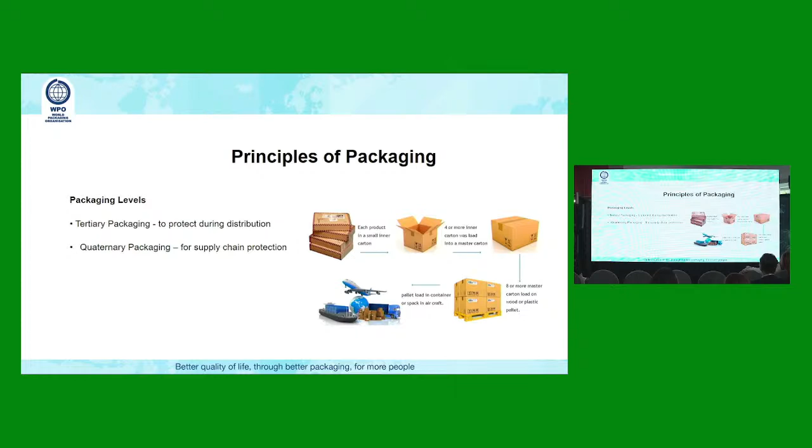All right, now let's have a look at some of the other areas. We looked at containment—what about compatibility? Remember I said that glass is inert. So we could in fact use glass for everything.

But we don't, because of price. Glass is more expensive than plastic. But certainly from a compatibility point of view, it'll be perfect. So now we've got to check whether that product can be used in a particular material.

And when we talk plastics tomorrow, I'll explain to you the various types of plastics, and there's a range of different plastics, and how we make the choice in using the different plastics so that we don't make an error and you're faced with a problem in the market and you have to do a product recall. That is very expensive.

Retention, you can see here in the flowers, for example, that is being supported and is retained and restrained in that carton. For those of you who have ever been involved in flower packaging, it's a very unique sector of packaging that not many people get involved in. Every single day, millions of flowers are moved across the world.

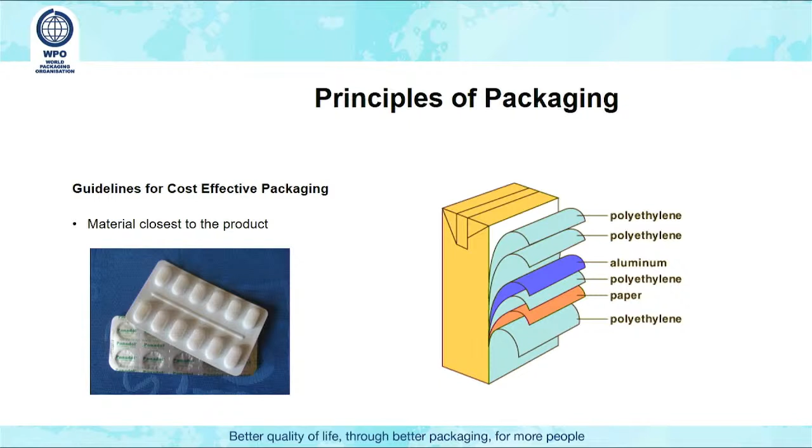That's effective packaging. What about looking at the design of cartons where there's over-engineering? We see this fairly often in corrugated packaging, and I'll emphasize that more tomorrow in relation to designing it suitably for that particular product so you don't overuse the board. Likewise with the image on the right-hand side - if you're using high volumes and that lamination film is maybe 70 to 80 microns, if you went down to 70 microns, you still maintain the shelf life, that's important, but that saving of 10 microns over a few million packs can be of value to your company.

Even with the advent of all these stand-up pouches, you also need to ensure that you are considering the effectiveness of that pack in all manners, not only the material type, but how well it is accepted by the consumer. As I've shown you a few slides ago, how easy is it to open and close and to handle.

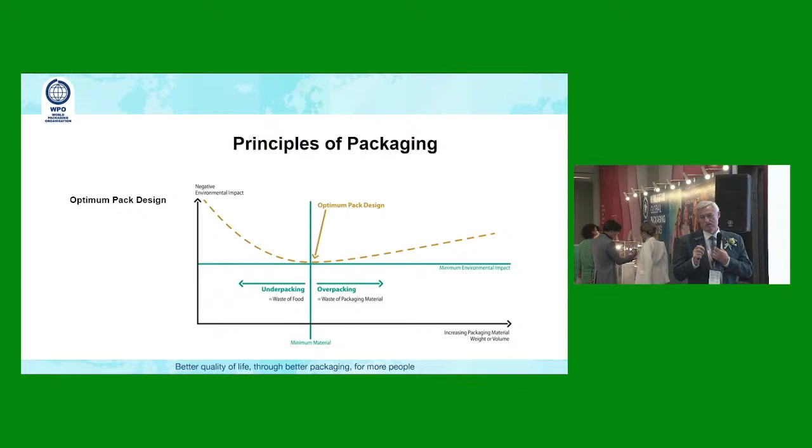All right, for those of you who attended this morning in the conference, we looked at this image because when we design packing, we want to go for the optimum pack design. What do I mean by that? We don't want to overpack and we don't want to underpack, because when we underpack, we could waste food because the packaging is not suitable. If we overpack, we could waste a lot of packaging material.

So we've got to find that spot, the optimum pack design point, so that we don't overpack and we don't underpack, but we maintain the suitable shelf life for that particular product. And that will vary for every product that you're packing. So you can't use one outcome for any other product. You've got to evaluate every single product to ensure that you obtain the optimum pack design.

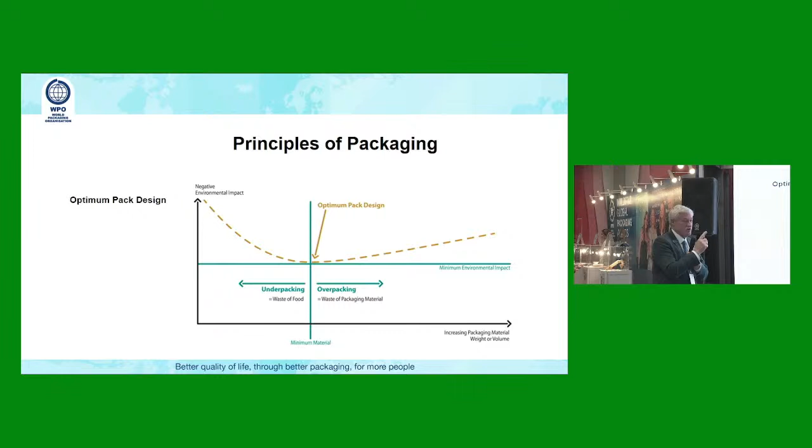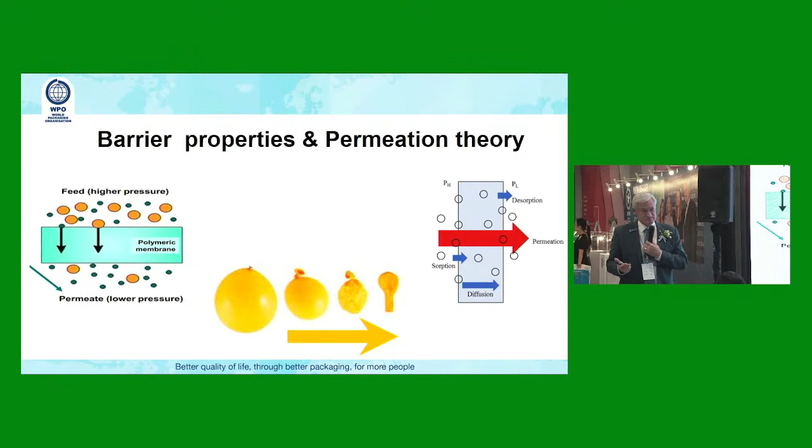Now, some of you might not know the permeation theory or Fick's law, but I use the balloon as an example, because if you blow a balloon up for a party and the next day you come and the balloon's gone flat, it's deflated. Where has the air gone? The air has not gone through the knot that you tied in the balloon. The air has gone through the layer of that material. It's permeated through the wall of the balloon.

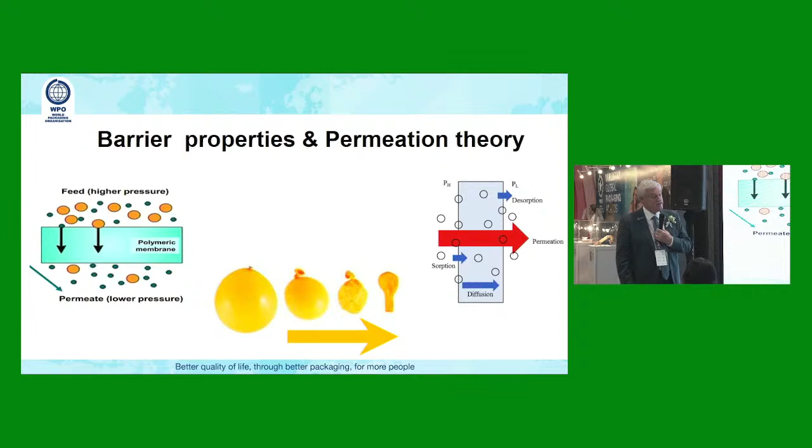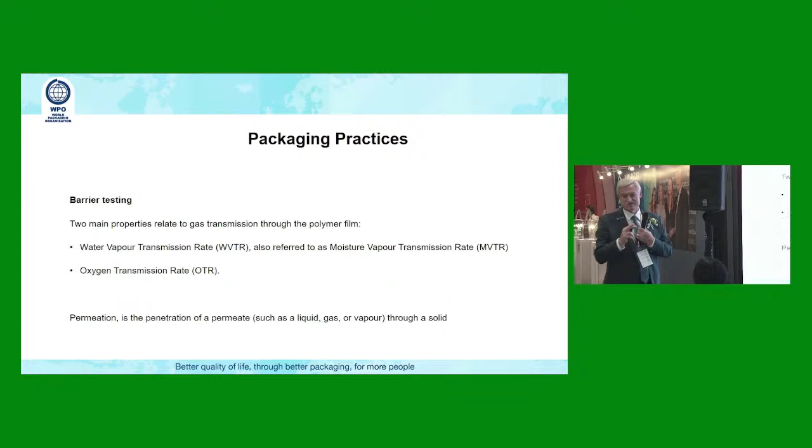So we take the same principle into packaging, same principle. And that's how we determine shelf life. And every one of you that are involved in packaging should, if not must, understand the theory of permeation. Because ultimately we look at the water vapor transmission rate and the oxygen transmission rate. Those are our two pivotal points that we always look at in packaging. We've got to understand water vapor and oxygen to understand the shelf life of a product.

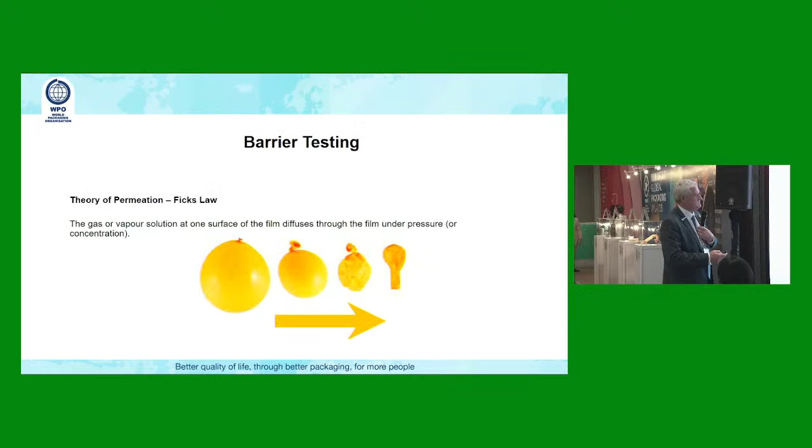So we're going to look at diffusion, Fick's law, this afternoon. So I'm explaining the balloon concept to you, and I'll now take that into a packaging environment. So the horizontal line at the top and the horizontal line at the bottom, I've increased the thickness of the material of the balloon. I've just made it big so you can see what's happening.

The other aspect that we must think about is this RAM, relative atomic mass. Now, don't worry too much about those words if you haven't done organic chemistry and might not understand them. Just look at the principle and try and understand the principle. In relative atomic mass, hydrogen has a relative atomic mass of 1. Carbon, 12, nitrogen, 14, oxygen, 16, and chlorine, 35.

And that relative atomic mass equates to the size of that molecule for that particular element. Okay, for those of you who remember the periodic table at school or at university, that's where those things come from. But for you folk now, all you have to worry about is taking those different elements and equating it to a size, because relative atomic mass shows you the size of the molecule.

And it's those molecules that try and force their way through from a high concentration or a high pressure inside the balloon, the pressure is higher, to a low pressure or a low concentration. That's what those molecules are doing. They're going from a high concentration or pressure to a low. So you can see the top is high pressure, the bottom one's low pressure.

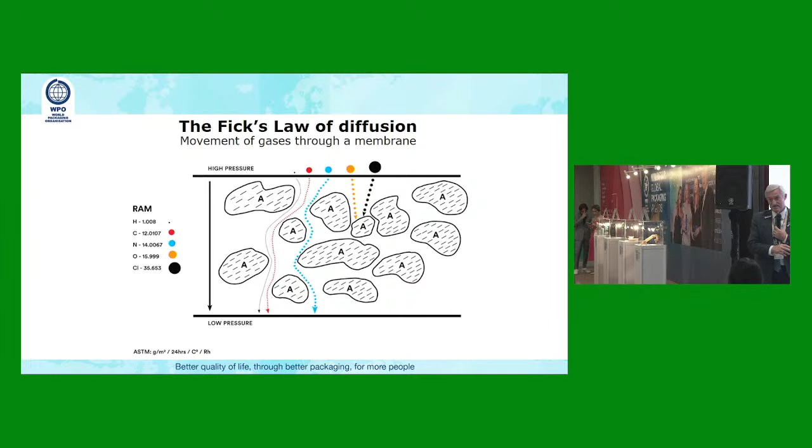So, over a 24-hour period, and you can see down below here, we measured in grams per square meter over 24 hours at a particular temperature and a particular relative humidity, and we have a look at how much of those molecules are coming through in 24 hours. You've got to remember that that image there is in a plain two-dimensional scenario.

You've got to imagine it as three-dimensional, because those A's, which are atoms, are moving all the time. In this chair, in this floor, in the ceiling, in that concrete, they're atoms, they move all the time. Believe me, they're moving. You can't see it, but they are moving all the time. Same as in a material, in the balloon, it's moving.

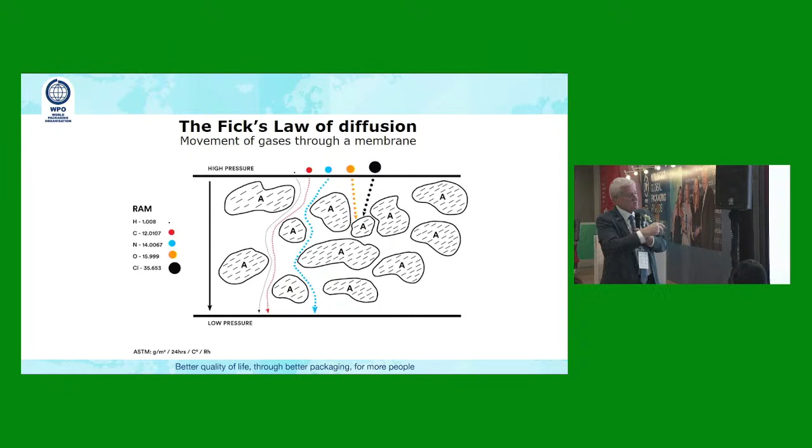So if one looks at the black and the orange, you can see the molecules trying to come through, but it's blocked. At that moment, it's blocked by the atom. The very next moment, 1 second later, there could have been a slight movement and it could slip through. So those molecules are trying to get through, and we measure how many of those come through the wall of the balloon in 24 hours at a particular temperature and a particular humidity.

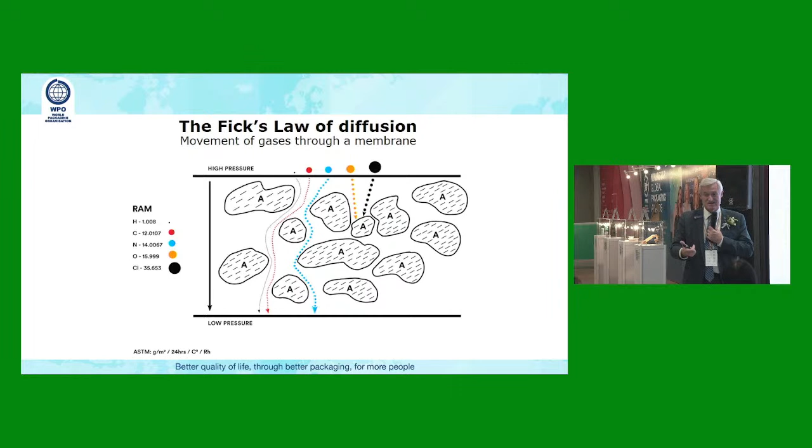And that is how we determine the shelf life. Shelf life is determined by that theory. So you've got to understand the theory to determine shelf life. And you've got to understand the theory to determine which material is the best material for your product at the cheapest price. Don't forget, you've got to remember the cheapest price, always. Okay, and that's just showing you how we apply it.

Right, now that we've looked at the basics, and I'm hoping that all of you understand them. Any questions before we go into glass? Any questions from the two ladies in the front that you'd like to ask? Is Ms. Atala listening? Any questions from you? Not. Right. Any questions from anyone else?

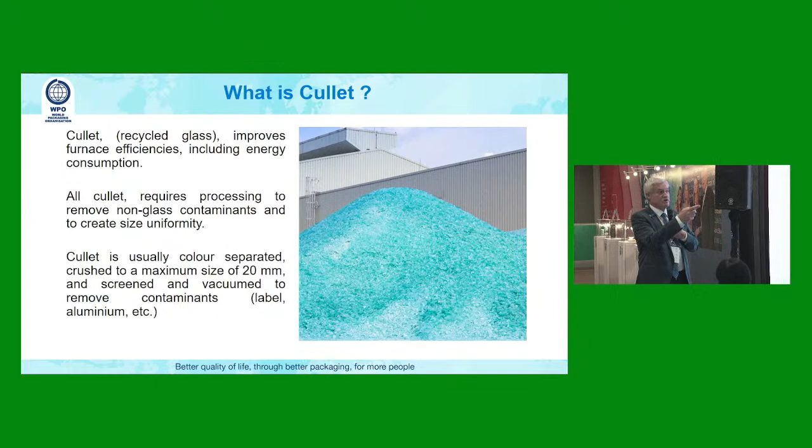You think I'm not going to ask you any more questions, that's why you're leaving. Is that right, Mr. Atta?

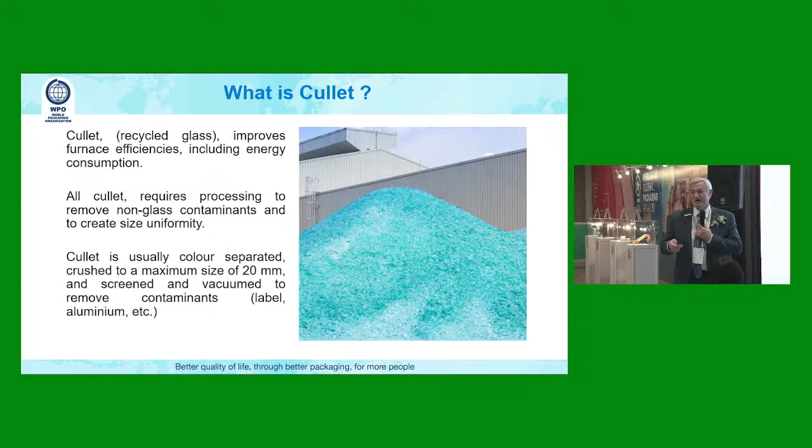We have type 3, type 2, and type 1. Type 1 is the most expensive. We use that in pharmaceutical. It's got borosilicate glass, and we only use it where we really have to. And then the cheapest one is type 3 glass, and as you can see, that's general glassware.

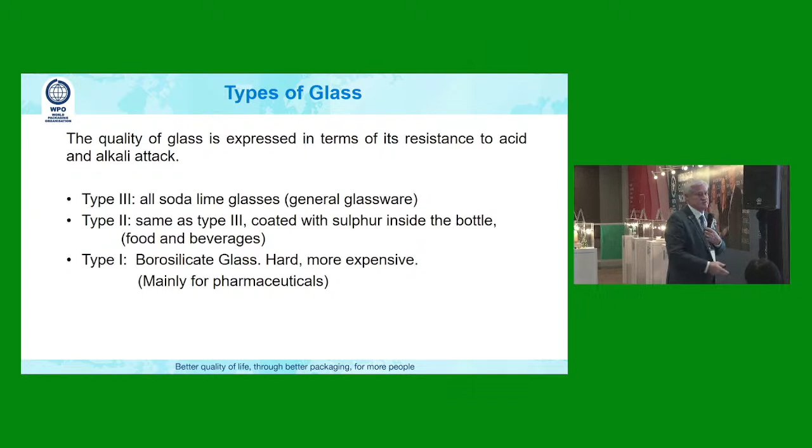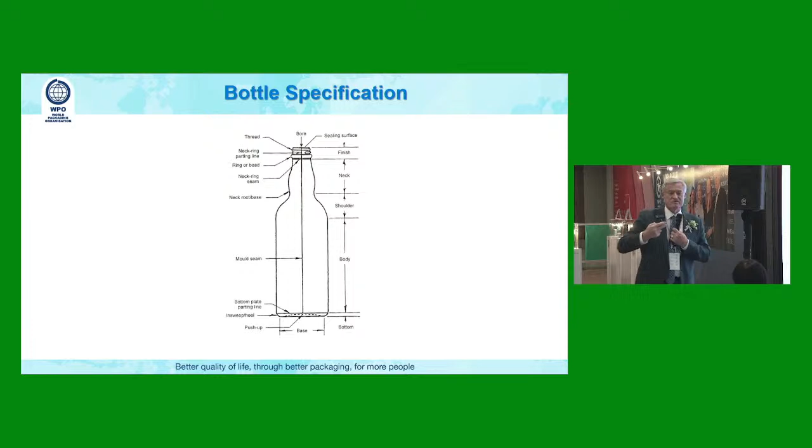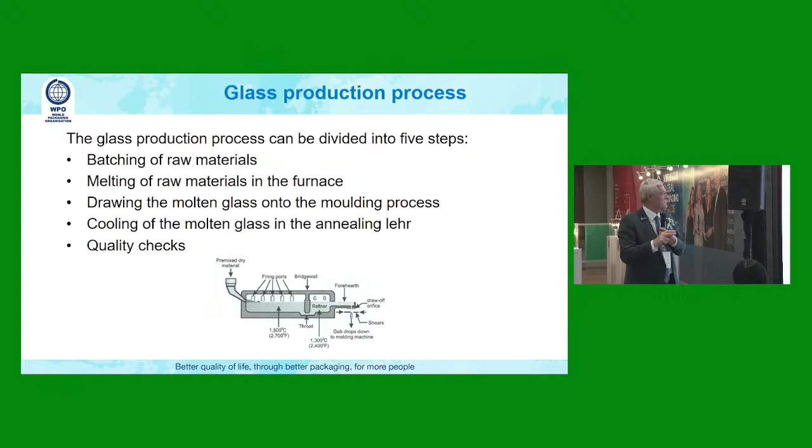And if we don't understand where we require the flow to be suitable and use the right name when corresponding with the supplier, then you won't get the message across in what you're trying to achieve for your particular pack. Okay. So those are the 5 steps that we look at very briefly. We've got the raw material, we put it in the furnace, we melt it, we then put it through the molding process, anneal, and then we quality check it.

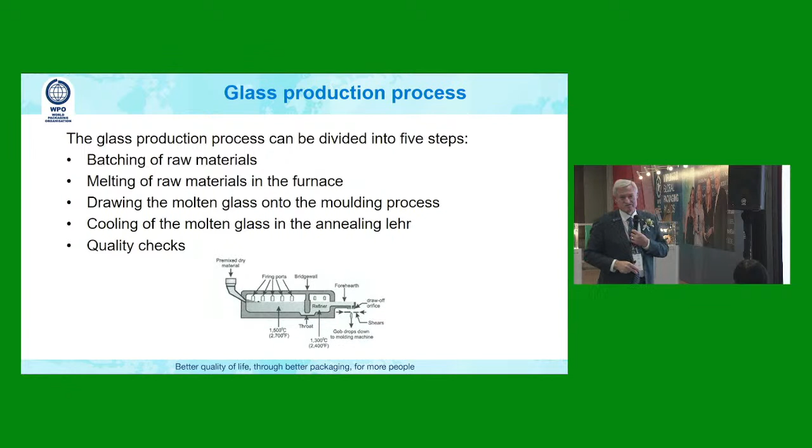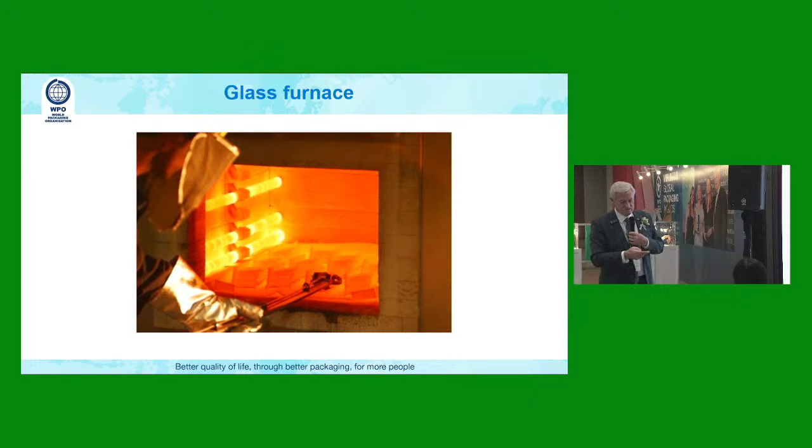Let's go through those more definitively. That's the furnace. And we heard a moment ago, 1400 degrees is not unusual for the melting of glass. So it's really, really hot. This photograph, for example, this is a guy here, you can imagine how hot that must be to work so close to that furnace. This gives a nice image of what we're trying to do in the glass. You can see all the components being added into the furnace. You can see the furnace there.

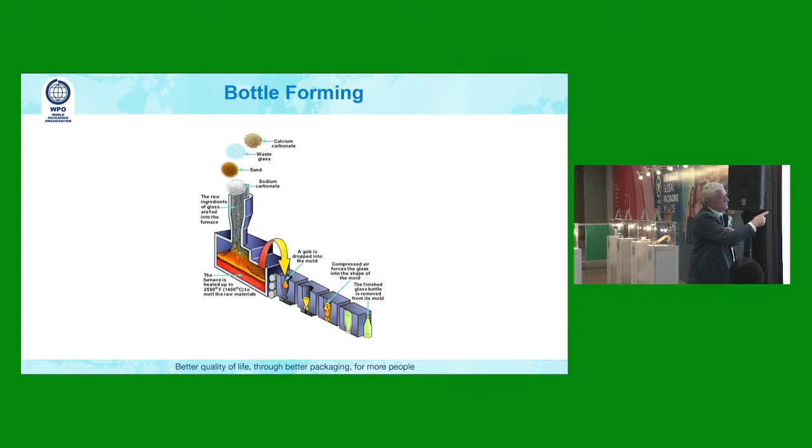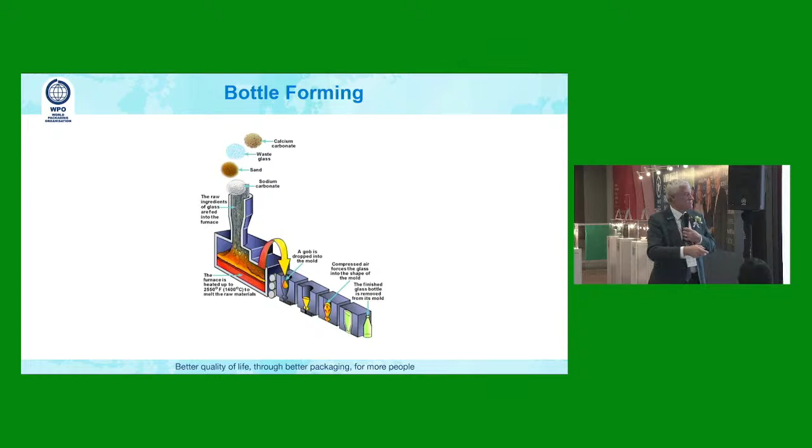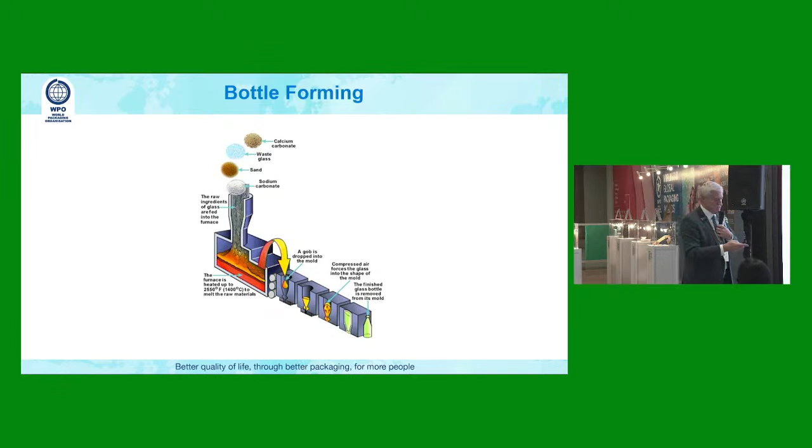That's then transferred into your mold. Now remember this image for those of you who are coming back tomorrow for plastics, because what we do in plastics is very different from what we do in glass. Glass is very aggressive. We need thick molding apparatus. These parts over here are ceramic based, very different to what we'll see tomorrow in plastics. But they're still molds, all right? So bear that in mind tomorrow. That's when the bottle is just coming out of the molding process. So that temperature there, you can imagine, is extremely hot. You cannot get close to that.

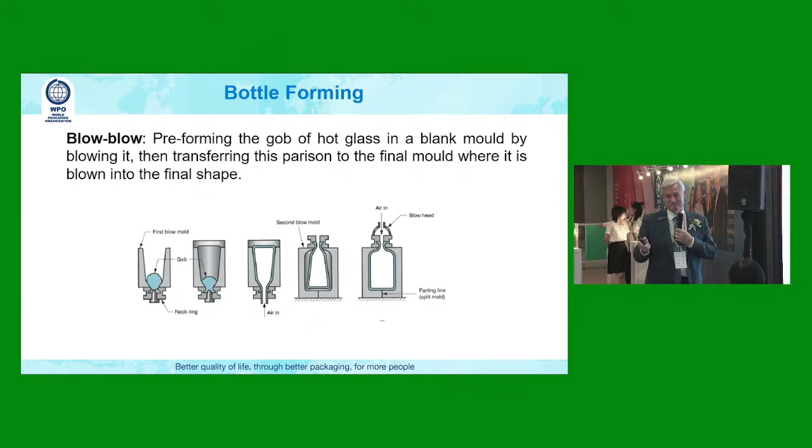Even with protective garments on, it's a challenge to remain there for an entire shift, and so they change the shifts quite regularly for people working close to the furnace. What I always say to people is, if you like your holidays, don't work for a glass manufacturing company, because glass never stops. If the glass solidifies in the pipes, you can imagine you've got a problem. So glass never stops production.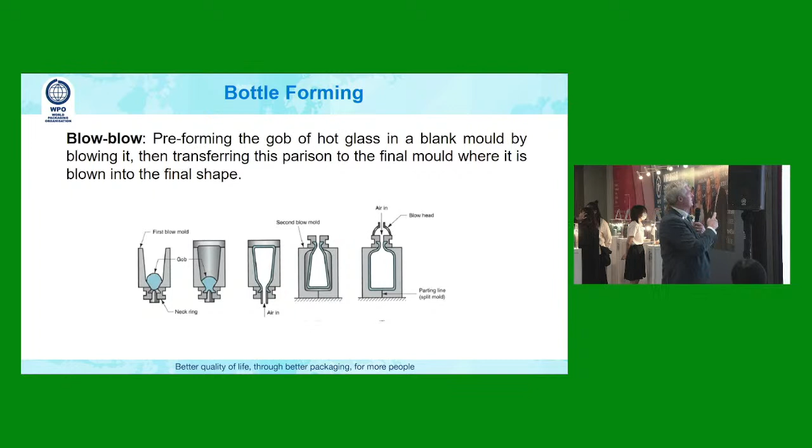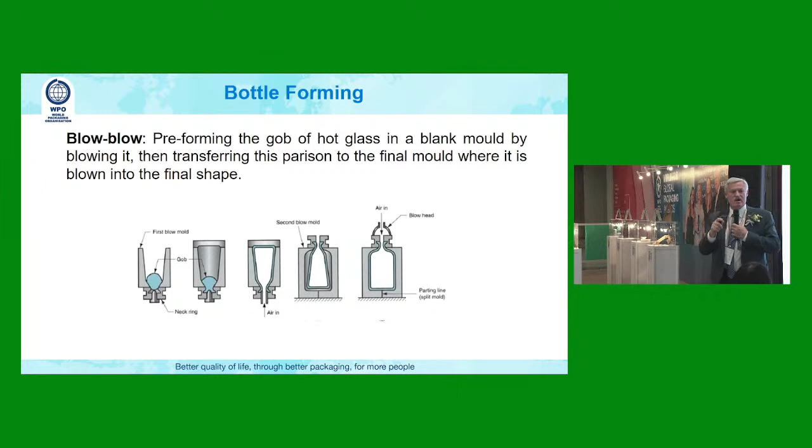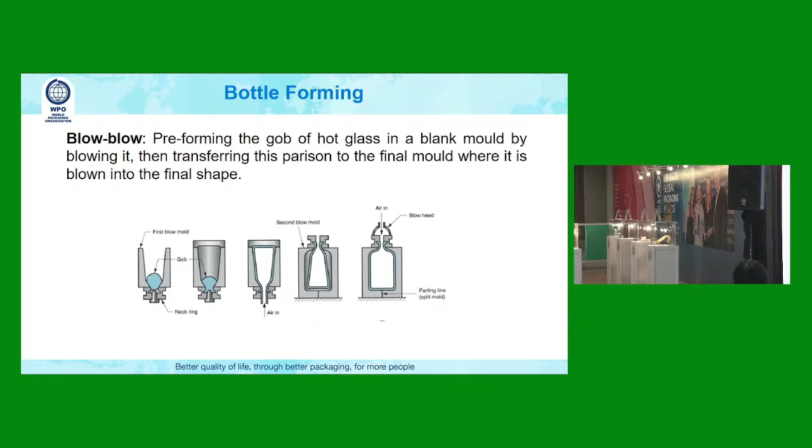We've got three different ways that we mold glass. The first one is blow-blow. What we're doing is the gob comes into the mold, the mold closes, and we force air into it in the first phase, then blow in the second phase. You can see it folds it up. We call it blow-blow. We only blow when the orifice of the bottle is smaller than the diameter of the bottle.

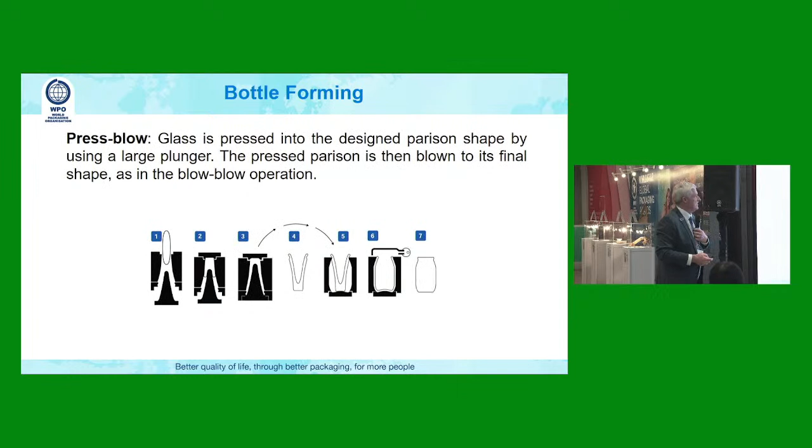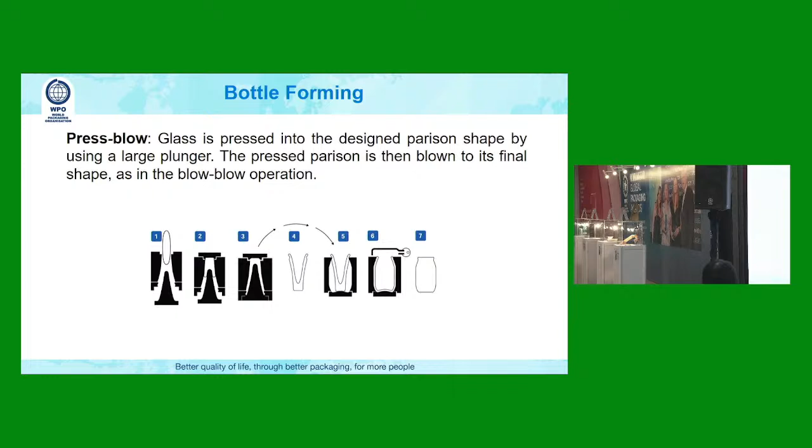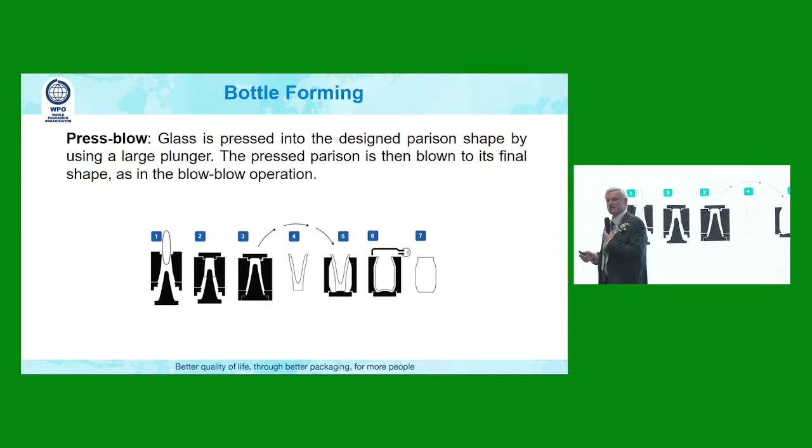Next is press blow. We press the mold first with the gob of glass. The mold closes, a male die comes in and makes that shape for the first phase - that's the press part. Then we transfer it, close the mold, and blow it up into the jar. Again, we have to blow because that size is smaller than the diameter of the bottle or jar. So that's press blow. The last one is press, which is just that first phase only, like a glass for drinking water. So those are the three different ways we manufacture glass.

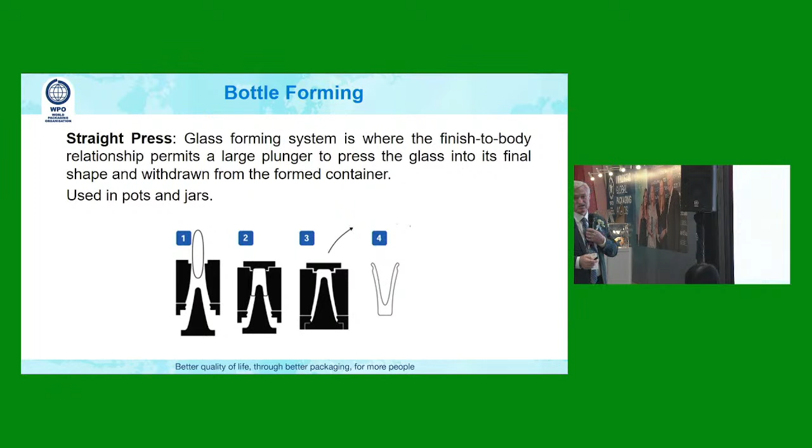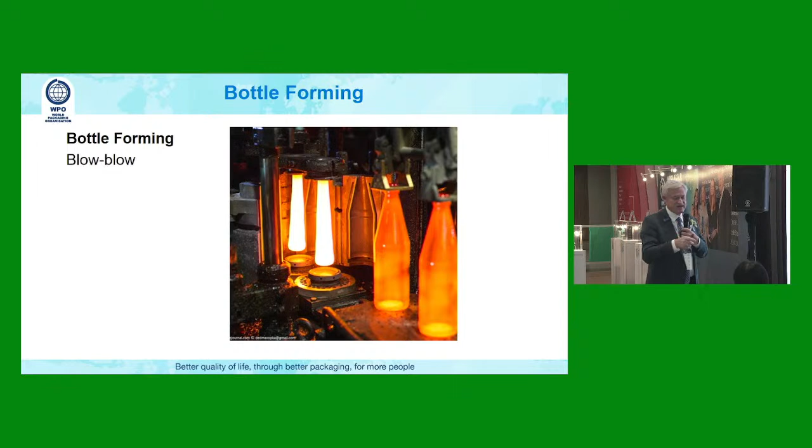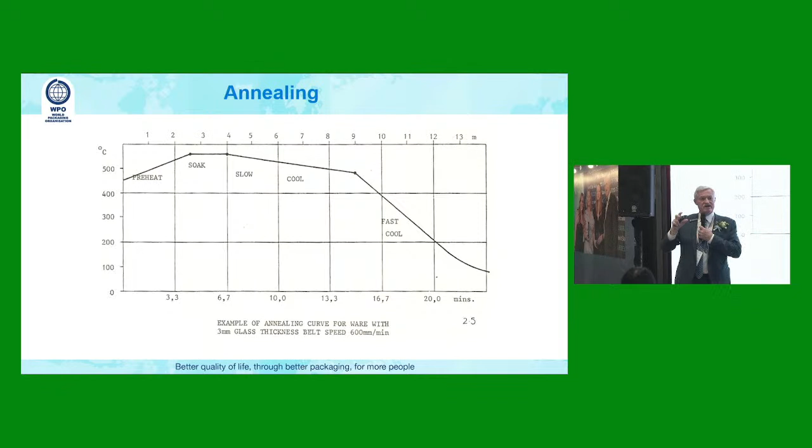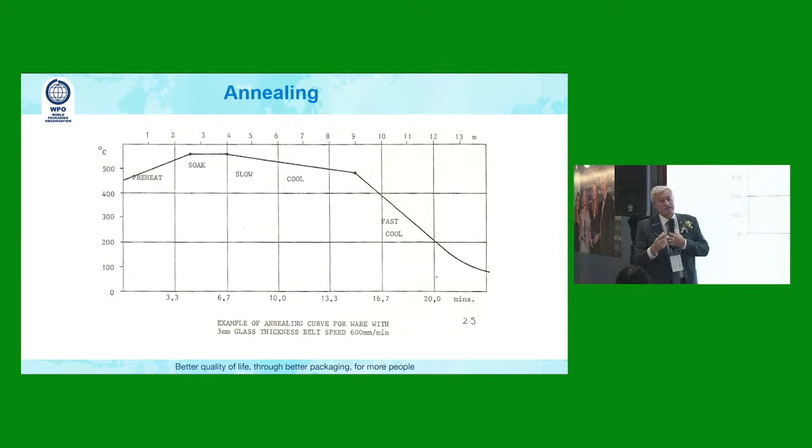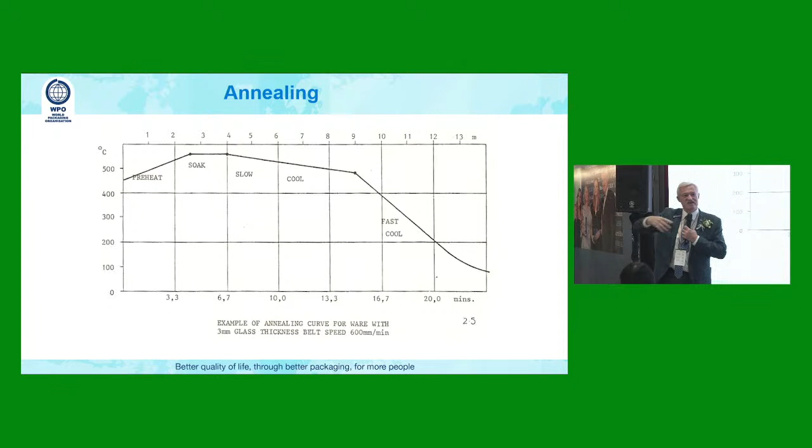What happens in the annealing oven is this: we raise the temperature of the bottles going in, hold the temperature there for a period, and then slowly bring it down. This relieves the stress in the bottle - in a way, it's realigning the molecular structure. By reducing that stress, if we hit two bottles together, they won't break. If it has not been annealed, if you hit two bottles together, it will shatter. So every bottle you see around in this show would have gone through an annealing oven - how do I know that? Because it would never have reached the show, it would have broken long ago. So every bottle has been through an annealing oven, which is that oven there. We realign the molecules in that structure to relieve the stresses.

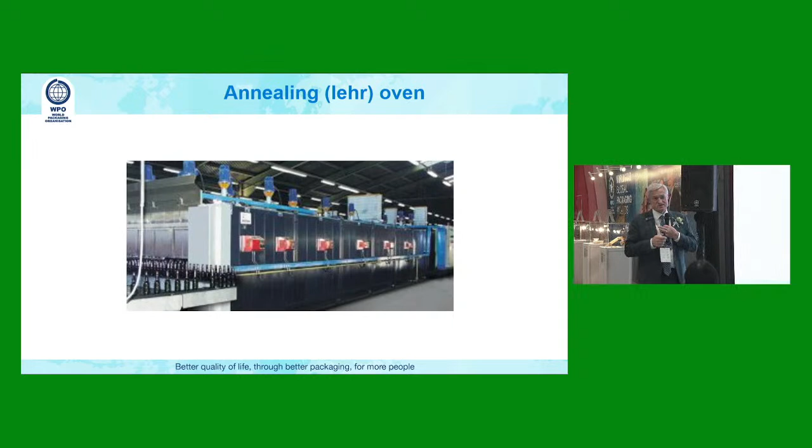Now, unfortunately, we have defects in glass. We'd like everything to run perfectly, but it doesn't. So what we have is this: we have seeds in the bottle - little air pockets that form in the bottles. Not really common, but they are there, it does happen from time to time. We also have bubbles, which are large seeds.

We also have stones. Now you might ask, why do we have stones? You told me you melted the silica sand. Well, if I've got silica sand out there in the land, and I'm collecting the sand, we know that the wind blows. So some grains of another sand, not silica sand, might blow into the silica sand. Now you have a foreign grain of sand, and that foreign grain is not silica sand, so it doesn't melt at 1400 - it could melt at 2000. Well, we're not going up to 2000, we're only going up to 1400. Therefore, that stone has not melted. That's why it's there. It's a natural product - glass is natural, sand.

We've also got a spike - it's an accumulation of glass. So we have two problems here. When you have a spike, that spike could dislodge. If it dislodges, it could end up in your stomach, and then we have a problem.

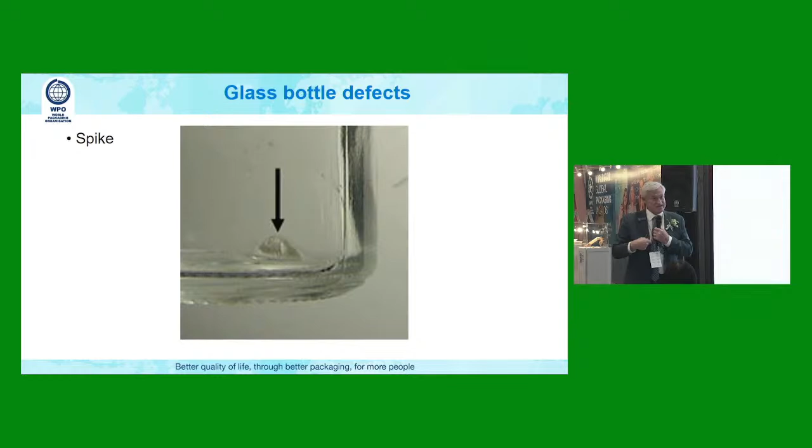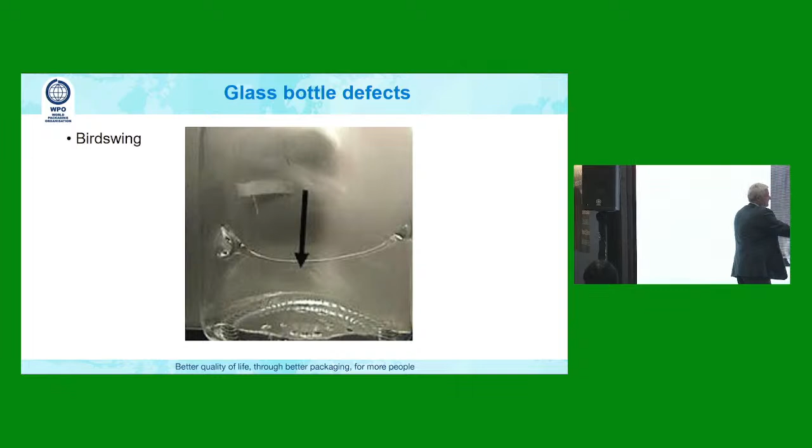And you have a problem as well, because you've got glass inside you now. The other problem is when we have a spike or a bird swing, wherever we have glass - you can see here we've got these marks, and more glass lying at the base of the bottle. That is one problem in case it breaks loose there.

The other problem is when glass accumulates here - remember you had a gob amount of glass that went into the mold. But if there's a whole lot here, it means these walls are now thinner because you're taking glass away from the walls and it's lying at the bottom. So it becomes a major problem because the walls of the container are weaker. And when you have vertical pressure, it could break. If you stack the glass bottles 10 high on pallets, imagine the bottom bottle - it's got a lot of vertical pressure on it, so potentially it could break.

All right, let's go back to... okay, so we've got bird swing. Now when you saw the way we manufactured the bottle, you saw the different processes, so you'd think there'd never be a bird swing. Well, guess what? There's a bird swing. I've seen 3 bird swings in my life, and I've been in this industry 37 years, so I know they're bird swings.

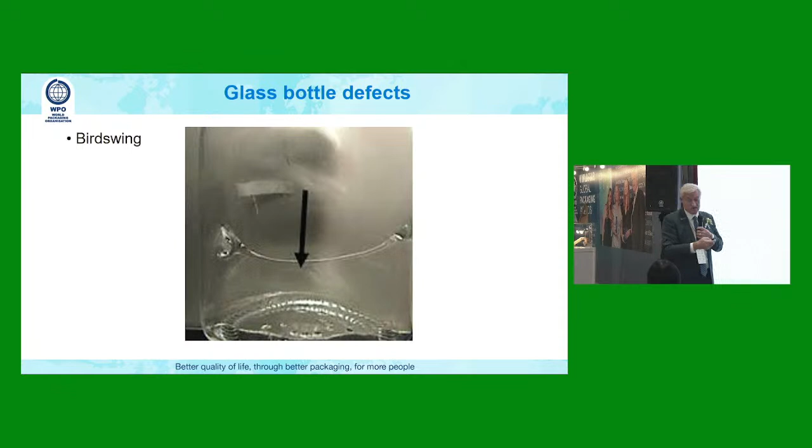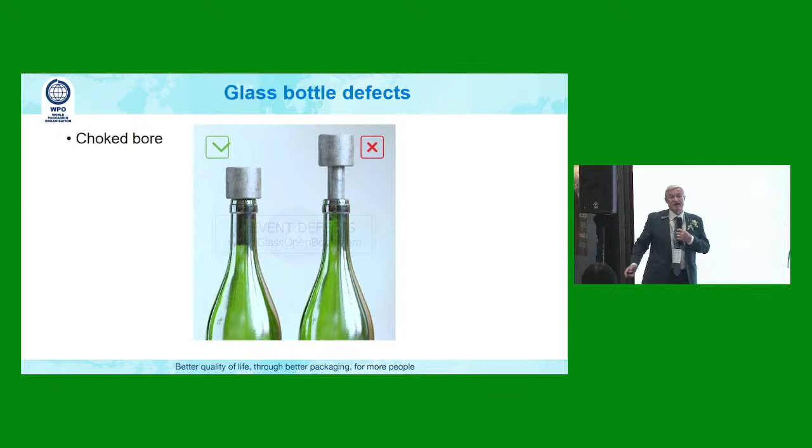These are just flow lines that are in the bottle because of the natural sand. This is very important in high-speed filling, because when that nozzle comes down into the bottle on filling, it cannot hit the sides - so the bore of that orifice is exact. That's how you can control it, because if it hits something, it's going to shatter that bottle. And you can imagine a shattered bottle in a high-speed production environment - that is a mess, and the line has to stop.

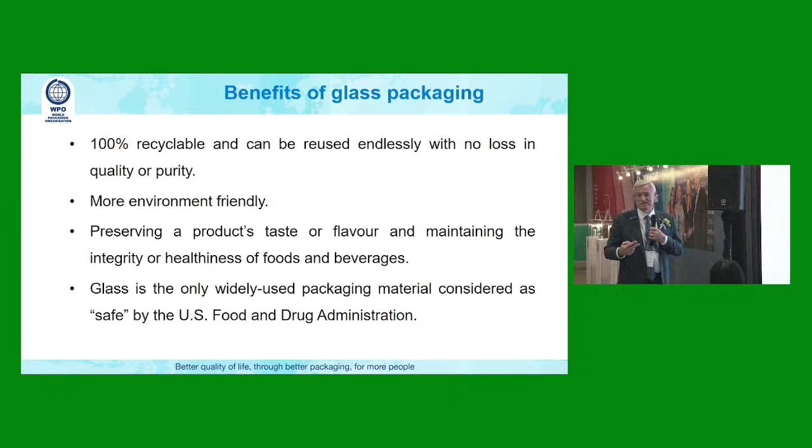There are many benefits of glass, and you can read as well as I can read there. But it is a very environmentally friendly material. It is inert, widely accepted in the food industry and the pharmaceutical industry. But it is more expensive than plastic, so that's why we've got to make that decision. Remember, right up front, I told you we're making a decision about the economics. Ideally we'd like to go glass on everything because it's inert, it looks good - but the product might not be able to support the price.

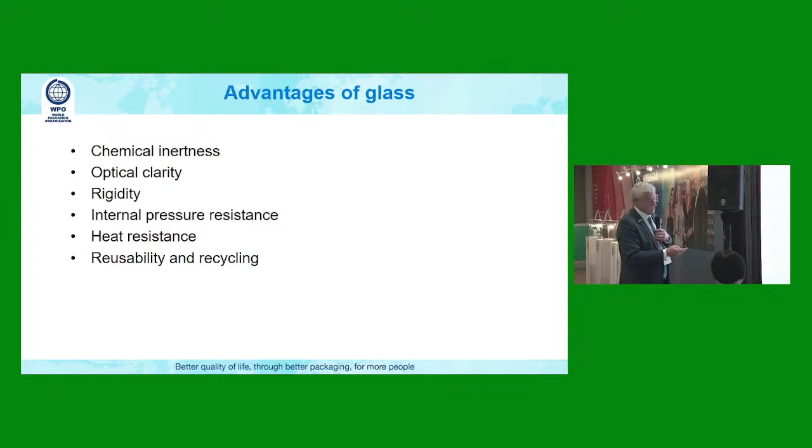Just showing you some of the advantages and some of the disadvantages. You can see the top one and the bottom one are the ones that come to your mind first, and quite rightly so.

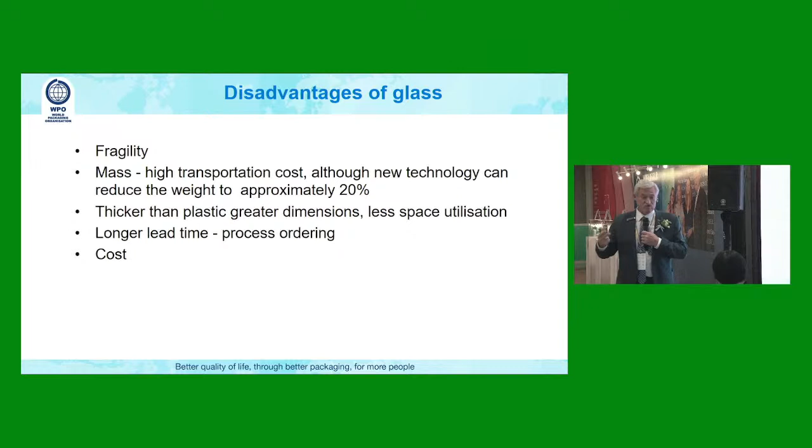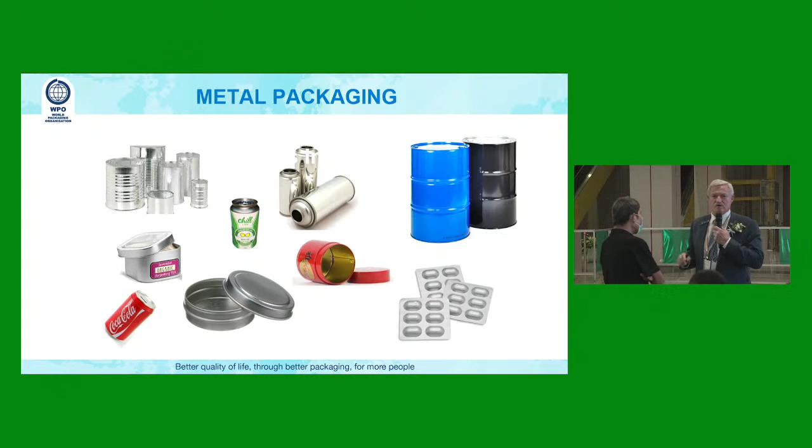Yes, sir - do you have an NNPB process, can you explain how it works, or NNPD? NNPB, NNPD - is that narrow neck press and blow? That might be another presentation in the class. Because you have blow and blow - what about NNPB, what are those acronyms standing for? I think it's narrow neck press and blow, because those are the only 3 that they use. Okay, what we're discussing here is the different forms of glass - remember the blow, press, blow, and straight press. Those are 3 different types.

In some countries the naming of these international forming processes might be different. But there are only three ways of making glass, even for a small vial or ampule, you still use one of those processes. I used the example of a bottle, a jar, and a drinking glass because it's easier to explain. But for an ampule, we still have to blow it, since you've got a very small orifice and a slightly wider body. So take this terminology back to your own country - I presume most of you are in Thailand, but naming of these forming systems can differ. That might be what you're referring to.

Any other questions? Okay. Have you been listening?

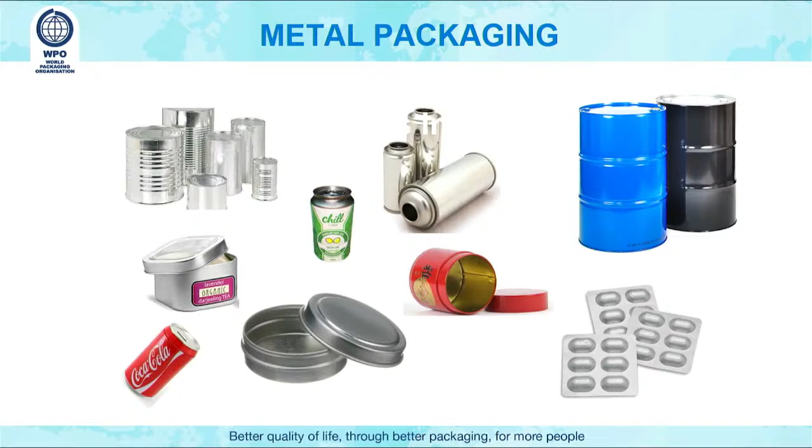We're now going to look at metal. It won't take long, probably about half an hour max, but it'll give you a very good overview of metals, which forms an important aspect of packaging - different uses of material for different packaging. Each is unique; one is not better than the other. There's a particular space for metals, same as there's a particular space for glass. So you can't say glass is better than metals - not at all, they're two different classes, we don't make comparisons like that. The only time we compare is if we're using glass and say it's very expensive, could I use plastic instead? We'll talk about that tomorrow at 3 o'clock - plastics tomorrow at 3 o'clock, and at 2 o'clock I'm doing paper and board, so if any of you use paper and board in your company, we'll look at that tomorrow.

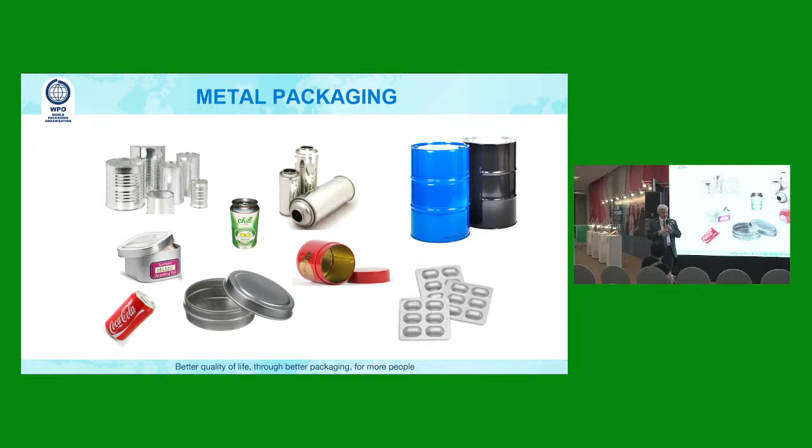You can see here there's a huge variety of different metals. You've got steel cans, tin plate, steel on the aerosol, aluminium on the cold drinks, tin plate up there, and here also tin plate, and over here aluminium foil. I will touch on metallization as well, since there is an amount of metal involved, hence the name, but I'll cover that towards the end of this lecture. Let's look at tin plate or aluminium, since they're the most common ones we use - yes, we do use steel drums, but I'm talking about the normal person in the street, who commonly encounters tin plate or aluminium. As you can see in the images at the bottom right, you've got the tin plate can and the aluminium can.

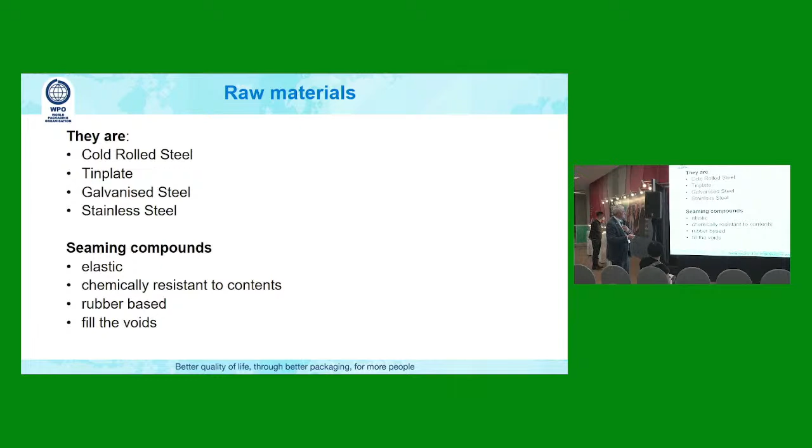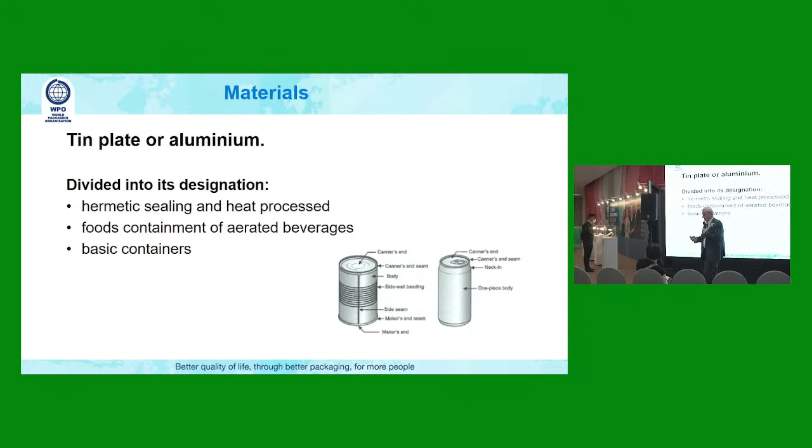Let's go back one slide here. This is what I'm referring to, this join down the back of a tin plate can. How do we do that? This is how we do it.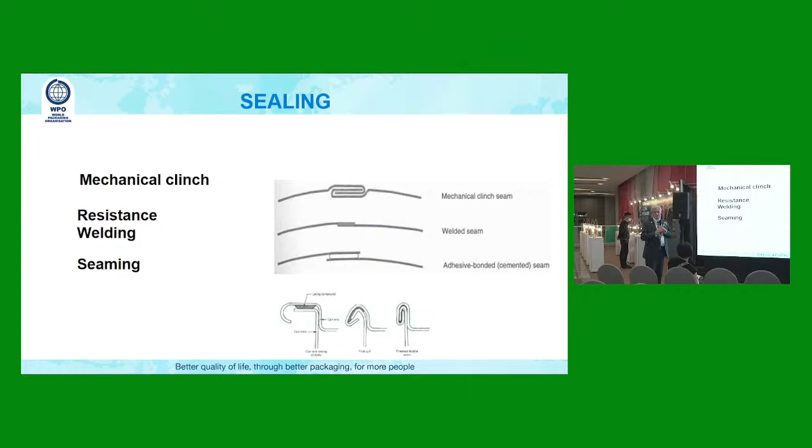We can either mechanical clinch it, which is this image at the bottom there, where you're actually folding one into the other. We can resistance weld, and we can seam it with an adhesive bond, using a normal adhesive - particular adhesive for the metal industry. Remember, adhesives are very particular, as the end uses are all different depending on what you're trying to bond. So bear that in mind.

I just want to show you more closely the forming of the body with the lid or with the base. You're actually clinching it like that, and you can see that if this is the lid part, this is the body part - the body has two sections and the lid or base has in fact three. So when you're working out how much metal you're using, that's the formulation at the bottom.

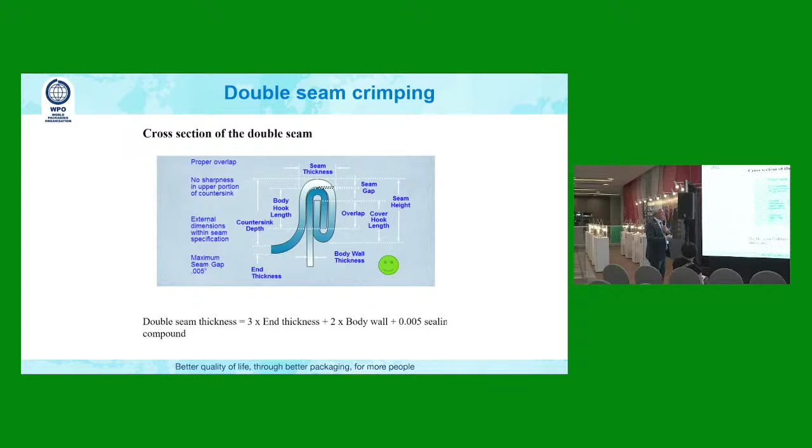That's very important if you're looking at the economics of it, especially when you're doing a lot of cans. So remember that. As you can see, when we're making a can, like your Coke can - Mrs. Atla, you know you collect Coke cans - this is how they're manufactured, so pay attention.

You can see over here you've got a roll of that tin plate. We cut it into sections, and then we stamp out the size of that body. We roll the body, and then we want to clinch that, like I've just explained, and close it off there. And then we put a base onto it, and we send it to the filling processing company.

They put the contents in, and they put the lid on top, and then mechanically clinch it again. So if I go back, they've got to go back to this mechanical clinching when the end processing company actually folds it. Bear that in mind. That's a simple tin can.

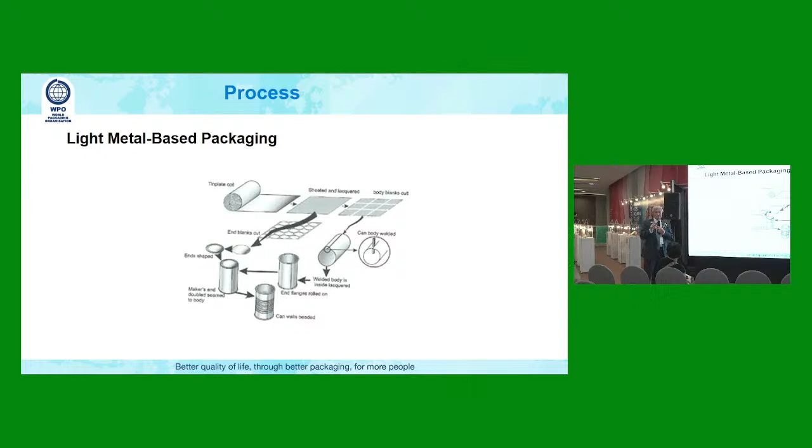Now your variation could, in terms of thickness, as you're getting bigger cans, the thickness proportionally increases so it can take that added weight, but not very much. We're only talking a number of microns, not millimeters.

Don't worry too much about this. In terms of tin-free steel, again, depending on what the product is, depends on what type of metal structure we can use. Because remember, if you have a high acidic product, you then have to put a coating inside that tin can, like a varnish, so that there's no interaction. That's why, going back to the last lecture, we'd rather have glass, because glass is inert. If you have tin plate or tin-free steel, you could have a reaction, especially if it's highly acidic.

If it was aluminium, different story, because we wouldn't have a reaction. That's the next closest to glass in terms of inertness - not fully inert, but better. But the problem with aluminium, why don't we use it for all our metal uses, simply comes back to economics - it's too expensive. So we go to tin-free steel or tin plate, but we have to use varnishes or internal lacquers to ensure we don't have any interaction.

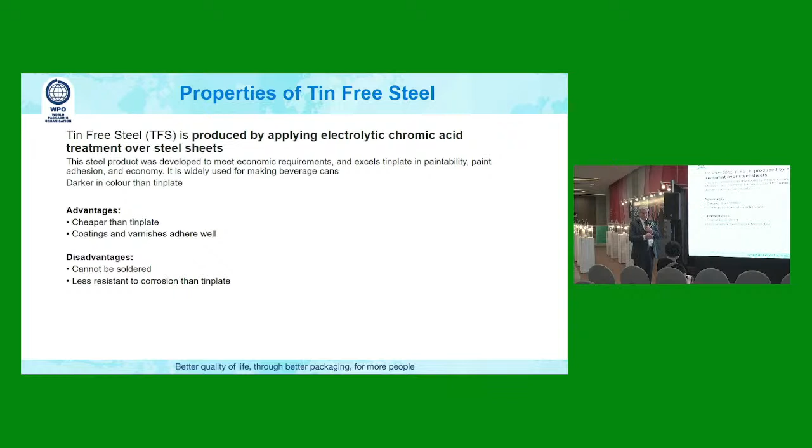Right, let's have a look at the manufacturing process of foil. We use foil in manufacturing when we do laminations. When you come back next year, tomorrow I'm going to be explaining flexible material, and in there I'll show you how we laminate materials together. We could be laminating foil, a layer of foil, which is different to metallization. Don't mix the two up - they're both aluminium, but very different processes.

So how do we make a roll of aluminium? If you use aluminium foil in the kitchen at home, the principle of making that foil or manufacturing into sheets is exactly the same as the foil we would use in a multi-laminate material structure - same process. Aluminium is a mined product, so once we've done the refining, we end up with an ingot or a block of aluminium, whatever shape that might be.

If any of you have ever made pasta and you're rolling pasta, it's exactly the same process, only in a very industrialized way. We have a block of aluminium, and we roll it, slowly getting it bigger and bigger, flatter and thinner. Then we cut it to size and roll it up, and we end up with a roll of aluminium. That's how you make aluminium. It's very rudimentary, although the processing has been refined so much in recent years. But the principle compared to pasta is exactly the same. When you roll pasta, you start with a thick layer, and when you finish it's a nice thin layer that you slice up. Same here - we roll it thin and we slice it up.

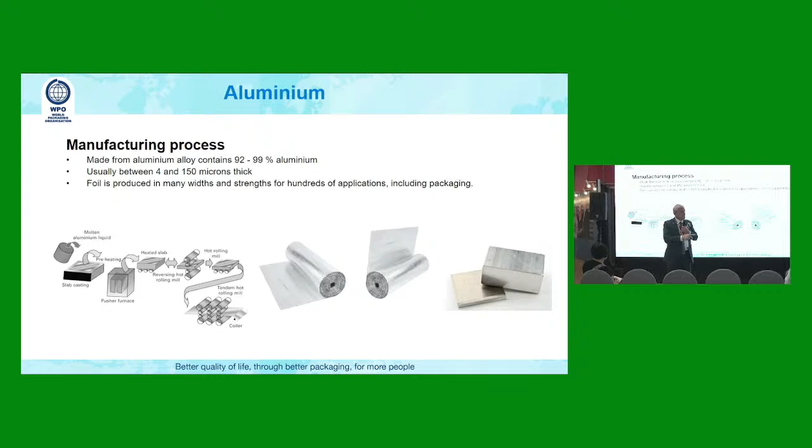It's very thin. If you looked at that under a microscope, you'd see droplets - in other words, there are spaces between the drops. But to the human eye, it looks like it's all covered. It's not, so it's not 100% barrier. Don't be misled that metallization is 100% barrier - it's not. If you use aluminium foil, that gives you 100% depending on the thickness. If it's too thin, like about 17 micron or less, you could have pinholes. In metallization, you definitely have lots of pinholes. So under a microscope, it's little droplets, like water on a mirror - aluminium on polypropylene or some other substrate. So you understand the difference.

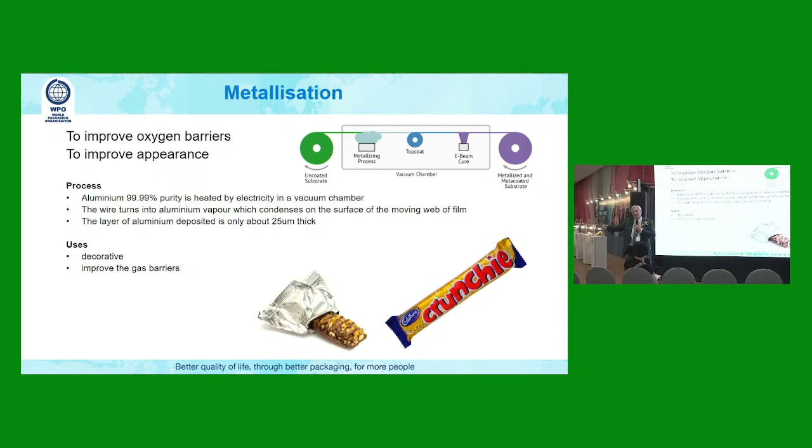So this all happens in a vacuum chamber. It moves, and the web is continually moving, and the vaporized aluminium settles on it, and you wind it up, and it looks like it's all aluminium, but it's not. But there's a need for it, there's a use for it, and you've eaten Crunchie before and many other products. Next time you open one of these packs and see nice aluminium on the inside, you know that is metallization, and you can explain to someone what metallization is.

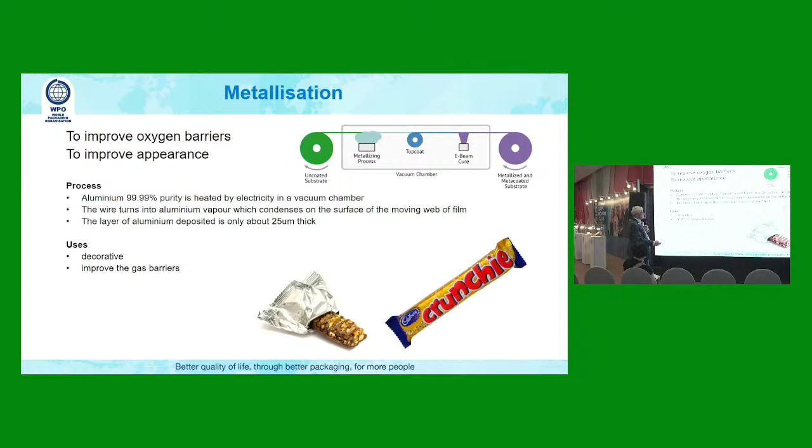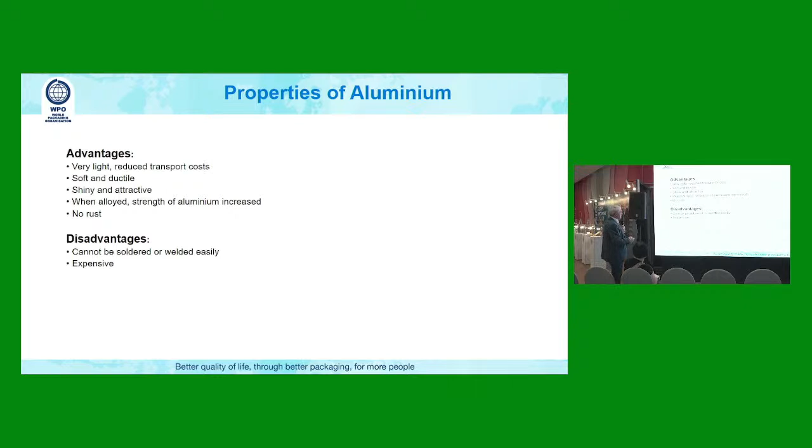So you can see the advantages of aluminium. It's light, it's soft, it looks good, it's shiny, it attracts the image, no rusting. The only problem is, number one, you can't solder it in cans, and number two, it's expensive. So we cannot use aluminium for everything. That's why we have tin-free steel and tin plate and steel and all those other metals, because we can't use aluminium every time. Economics always plays a part in packaging. That's the aluminium you use in the kitchen, and all of you know that.

And this aluminium here is around about the 15 micron mark. So potentially, if you look through a microscope, there will be pinholes. There will be pinholes. All right, you just can't see them with the naked eye. So it looks as though it's a nice, beautiful film of aluminium, but there are holes in it.

And that's why, if you have a blister pack, and you all know what I'm referring to, the ones where you pop out the tablets, you know, Mrs. Pellegrino, the blister pack there, all right? This one, you've got aluminium on the one side, PVC on the other side, and this here would be around the 20 micron mark, aluminium, no pinholes.

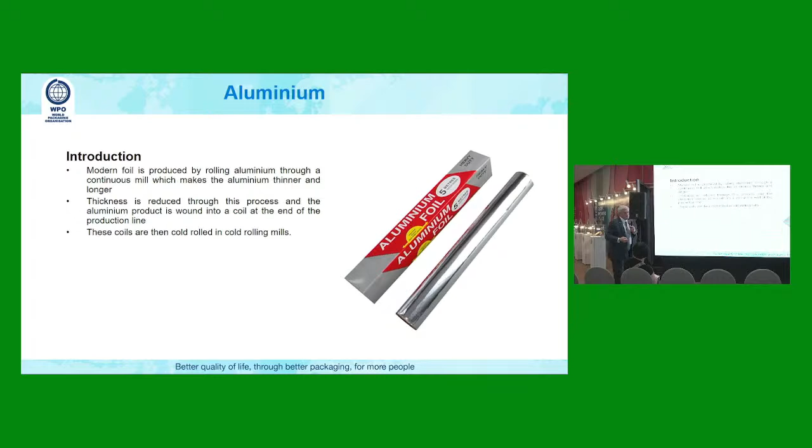Because if there were pinholes here, remember what I told you about an hour ago about permeation? The moisture will permeate through the holes and your tablets will go soft and it won't have a shelf life. Ms. Atala, you understand? Okay, so we go thicker. But in the kitchen, you don't have to have it thicker. It'll be too expensive. So we go about 15 micron. Could be a bit less, could be a bit more. But just to let you know, there is a difference there. All right, and then round up and seal it, and perfect, bingo, we got the answer.

Thank you very much. Are there any questions? I can see on your face. Do you have any questions? Are you sure? Alexa, any questions? Okay. Nothing. All right. Mr. Cameraman, you okay?

No questions? Can you explain metallization to me? You can. I won't ask you, but you can, eh? All right, you can explain it tonight to someone, if you had to. If someone asks you what's metallization, you'll be able to sort of explain. You know? Would you, Alexa? You could? There you go. Exactly. But I won't embarrass anyone. But as long as you now know that next time you see a crunchy, that's metallization and not aluminium foil.